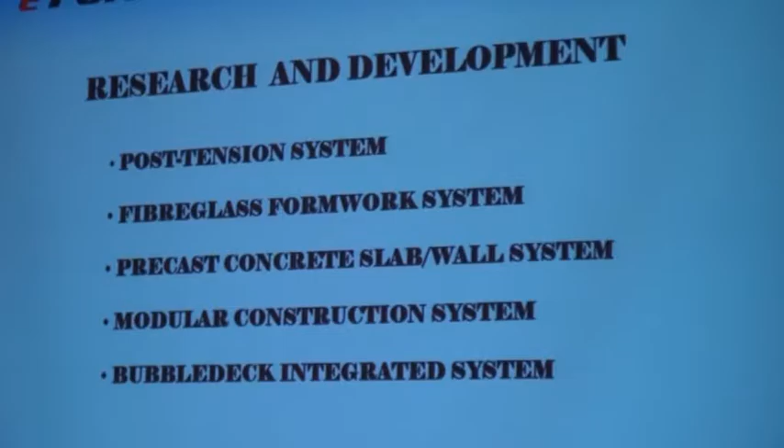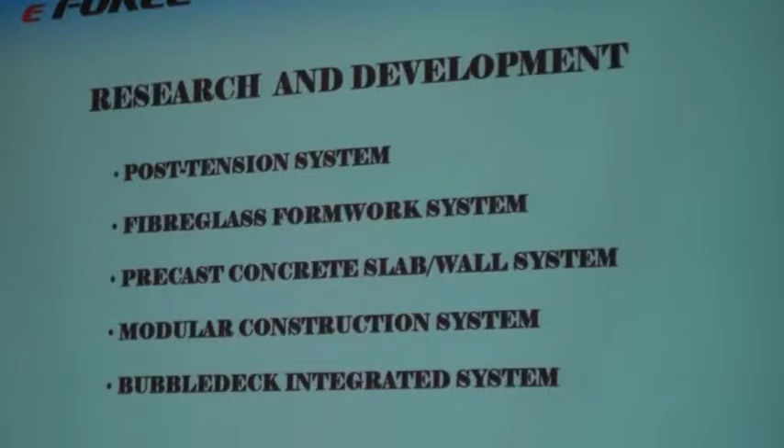For our group, we have some technologies where we've done R&D and developed. We have the post-tension system, the fiberglass formwork system. Outside we have displayed some samples. We have, of course, precast concrete slab wall, modular construction - it's like a Lego system, but this one is for adults to play, not children. So again, these are those emerging technologies. The last one is the BubbleDeck integrated system, which I will talk about more later.

For the post-tension system, we have done various tests and received approval from PTI, the Post-Tensioning Institute, USA. Our manufacturing plant is in China.

So if you ask why E - E-Force, E-Form, and E-Modular, why all the E? The idea came from iPhone, iPad, iWatch. So the I, we use the E. Basically it's similar whereby Apple developed new technology, we were thinking to do something similar, right? And it just falls into a nice place - Egypt is also E.

These are the testing facilities we have to make sure of quality control. These are site photos using the post-tension system.

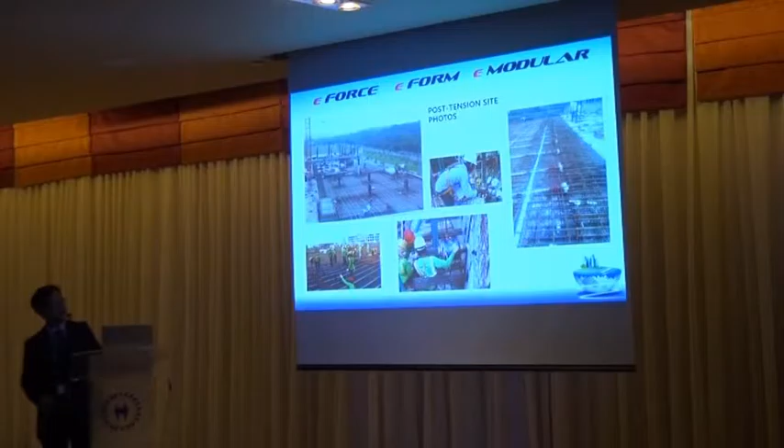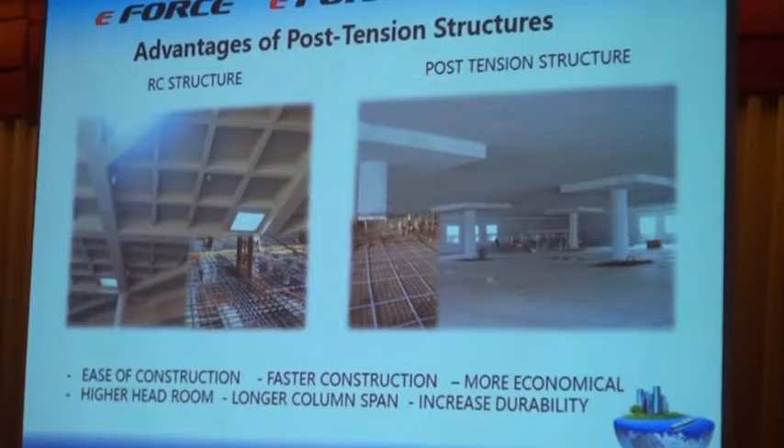But you should ask yourself, what is so good about this technology, right? I mean, any technology, like for example the iPhone, from a big phone becomes a small phone and gets smaller and smaller, right? So it becomes more convenient.

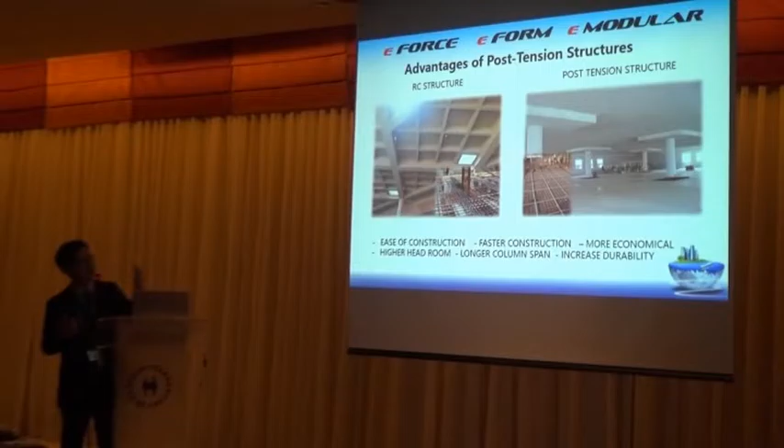Similarly for post-tensioning, it allows us to - if you look on the left side, this is a normal conventional RC structure. If you have a big span, we usually go for the waffle slab, but for post-tensioning, even for a 12, 13, 14 meter span, we can just go for a flat slab - meaning just a normal drop panel at the column. But because of this, look at the bottom corner - you see the amount of reinforcement you have in the normal RC, and for post-tensioning, it's very neat, very clean.

Because of this, you can have a faster construction cycle. If you take 14 days or 21 days in RC, you can probably cut it down by 30-40% compared to RC. Because it's faster, because you use less reinforcement, less concrete, it makes it more economical - especially for the client, it's all about money.

The indirect benefit, of course, you have higher headroom, you have longer column spans that you can use. So in terms of rentable area, in terms of effective usage, it's better using a post-tension structure. Of course technically, I think this afternoon they were talking about post-tension design, bonded and unbonded - technically speaking, you have better durability using a post-tension system.

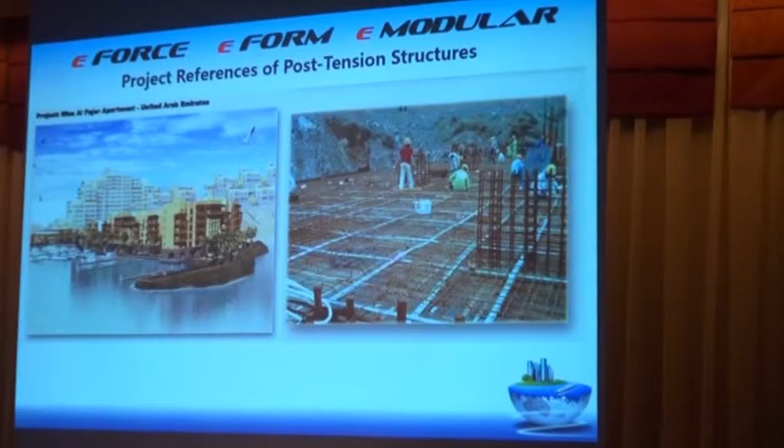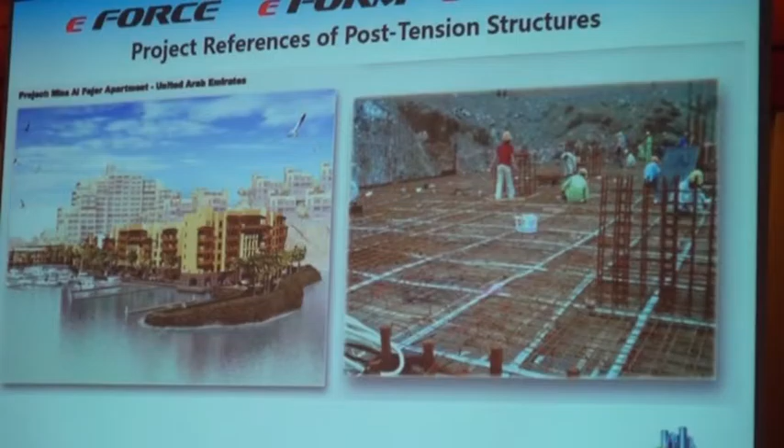This is some of the testing we have carried out in Singapore. The manufacturing is also in China. For our clients, we do the shop drawing, all the modeling, the formwork design, all in-house, in order to help them.

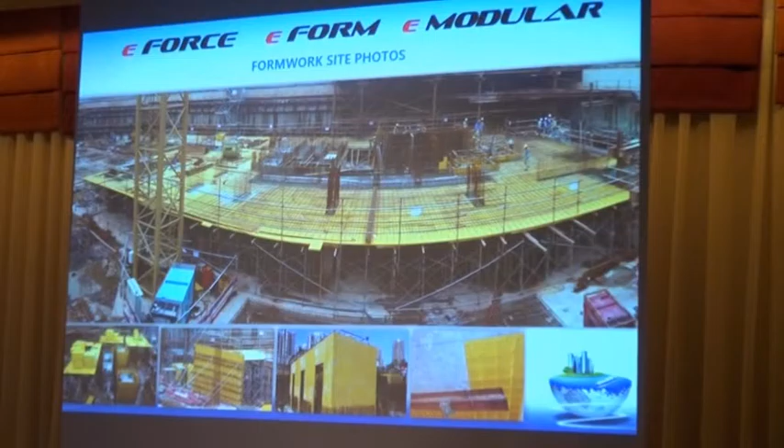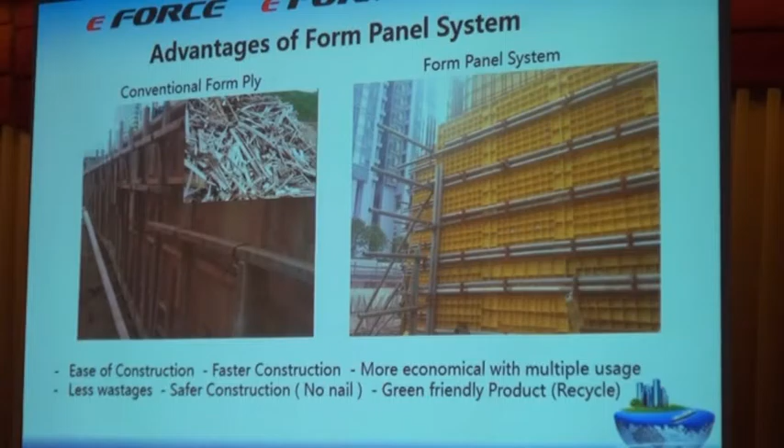As you can see in the site photos, this system can be used for shear wall, core wall, columns, slabs - almost any member of the building can use it. Then again we have to ask ourselves, what is the advantage of using such a system? If you look on the left side again, that's the...